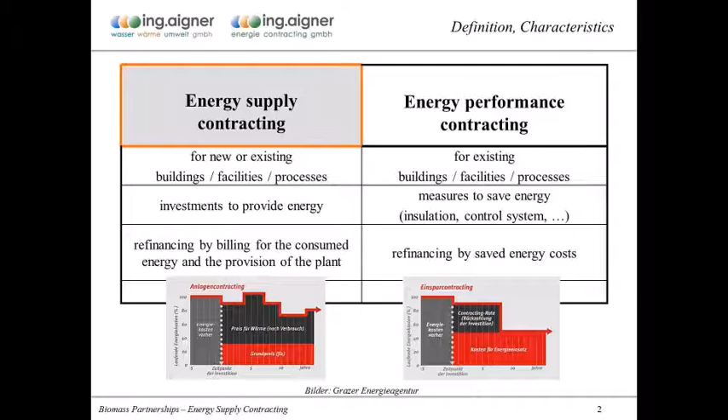When I'm talking about energy supply contracting or renewable heat contracting, I always add it with a full energy supply contracting or full heat contracting, which is covering all the stages which are required for the realization of a contracting project, or in specific a biomass project. So supply contracting is applicable for new and also existing buildings. The investments are primarily done to provide the energy to the customer, and the refinancing of the whole project is done by billing for the consumed heat on the one hand, and for the provision of the plant and for the services done by the contractor.

From the basic concept, energy supply contracting is an energy service. The aim of this energy service is to improve the efficiency in the energy production, but also, of course, on the secondary line, the efficiency in the energy consumption. When it comes to renewable heat contracting or to renewable systems, I always mention that just because it's a renewable system or a biomass system, that's not enough. Also, renewable systems, especially biomass systems, have to be really efficient.

What's the role of the contractor? The contractor is doing the planning, the financing, the construction, and the operation of the plant. And the plant can provide energy in form of heat or cold or steam or electricity, also compressed air, to the customer, to the buildings of the customer, to the processes of the customer. A main characteristic of supply contracting is that the contractor hires a room or a lot of land which he needs in order to build the plant or the equipment, and he hires that from the customer. The customer does not buy the plant. The owner of the plant is the contractor. The customer just draws the energy he needs from the contractor.

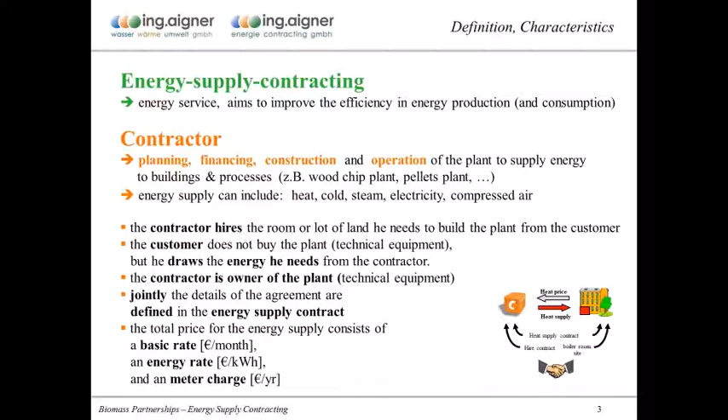All the details of this agreement are defined in an energy supply contract, and of course the contractor needs to get paid for all his services. And we have heard about the price models already today. I think in one of the first presentations, it was presented the basic rate and the energy rate, and also the meter charge.

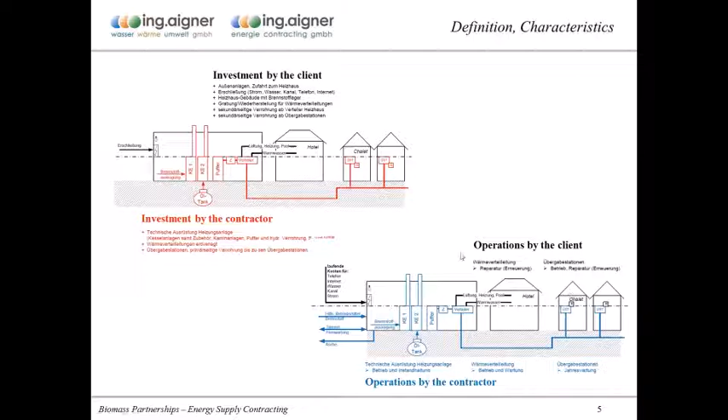Where can contracting be applied? Actually, there's no limitation, I would say. Usual applications are public buildings, hospitals, hotels, office buildings, and so on. And the concept in general is applicable for nearly every situation and constellation. It can be a customer with single objects or several objects, so then we have a local heating system. It even goes to a district heating system.

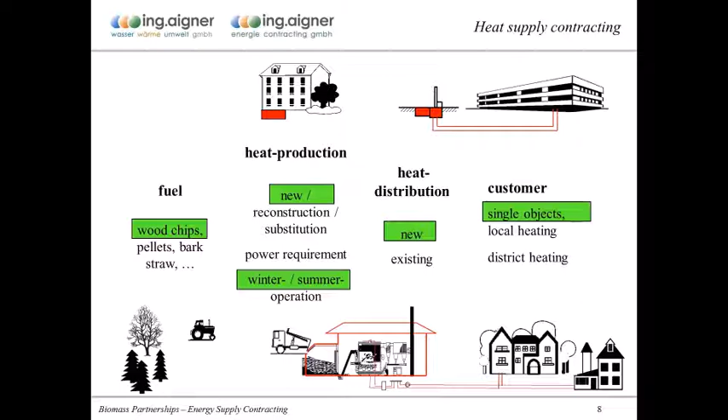The heat production system can be a new one. It could be a reconstruction of an existing system. We can have a winter and summer operation, or only winter operation. And also we can have different kinds of fuels, wood chips, pellets, or other renewable energies.

A very important thing in the whole contracting concept and process is, of course, the energy supply contract. I always say to our customers, in the discussion with our customers, that it's better to take enough time to clarify all the details of the agreement. We write it down. It's a partnership for normally 15 years. The acting persons can change, can shift. And so the other persons also have to know what was the basic idea of the whole project and contract.

And one thing I always mention is that as a contractor, it's in my own interest to have a common understanding of the responsibilities and duties of the whole contract, because it doesn't make sense for me to get a signature under a contracting contract if my partner or the customer maybe misunderstands something, and then we have 15 years of discussions and arguing. That's not the goal of a contractor, to have troubles the next 15 years.

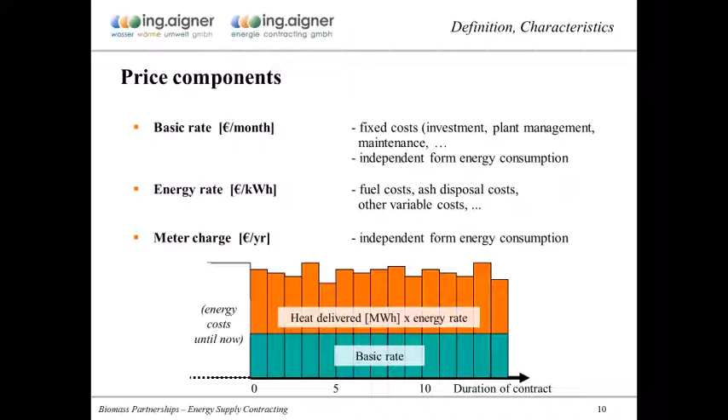On the markets, there exist several pricing models. I tried to put down here two examples of the two main pricing models, and the differences, the difficulties which have been encountered in Austria. Some companies have encountered these problems. That's why I would like to show this to you.

For example, we have a biomass plant. The nominal load is 1 megawatt. The heat demand is 2,500 megawatt hours a year, and the contracting period is 15 years. So these are just rough figures.

I said we have investment costs of 1 million euros, taking into account the funding, the financing, administration, operation, and repair costs. So the yearly production costs sum up to about 80,000 euros.

That's the fixed cost. The second cost group are the variable costs, as I mentioned before, fuel, ash, electricity, and so on. They sum up to about 30 euros per megawatt hour. So in total, the 30 euros per megawatt hour multiplied by 2,500 megawatt hours are 75,000 euros a year in costs for the operator of the plant, for the owner of the plant, for the contractor. In total, the production costs are 155,000 euros a year.

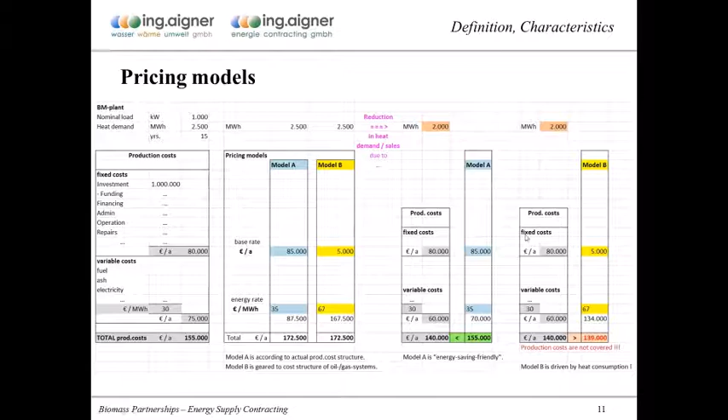Shifting to the price adjustment: because we have a contract period of normally about 15 years, of course price adjustment is required, and also for this theme, pricing model A is much easier, because the price development during the next 15 years, during the partnership, will be totally the same for the contractor and for the client. No difference if the client would have realized the project by himself or has realized it now with the contracting project. That's a very good thing, because actually there's no reason for discussions then between the client and the contractor.

Why are we talking about energy supply contracting today? Because I'm convinced energy supply contracting is a really powerful concept, a really powerful tool. When we're looking in general at the requirements in our energy supply, for instance for a hotel or a production process, we would like to have supply guarantee. We would like to have efficient, reliable technology. We would like to consider environmental aspects, get rid of fossil fuels, allow for the usage of renewable energies. We would like to become independent on a local or regional level, and we would like to have a high comfort.

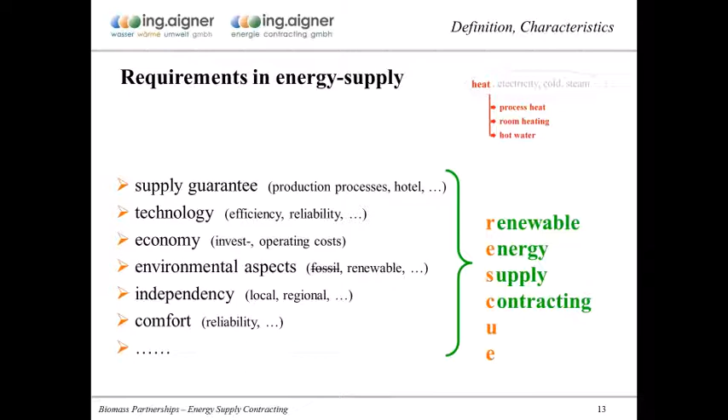And all these requirements are met by the renewable energy supply contracting concept. And this concept, it's a little bit provocative, but it can be one tool to rescue us on our way to decarbonization and efficiency.

The benefits, why is this so? There are a couple of benefits of renewable energy supply contracting, but one of the main really good things is that the investment costs are not a limiting factor anymore for the realization of renewable energy projects, because the investment costs are covered by the contractor. The contractor is calculating the total project for a time period of 10, 12, 15 years.

And so this allows the use of renewable and clean energy, the use of modern and efficient technology. And hopefully the contractor has special know-how of the technology he's using, so he can also gain a saving in the total fuel consumption. For the customer, of course, it's very comfortable, because all the risk and duties are assigned to the contractor, and normally the contractor has to guarantee the supply of energy, the supply of heat.

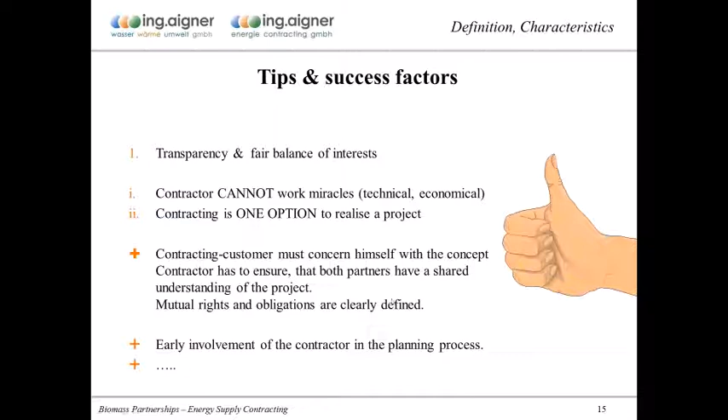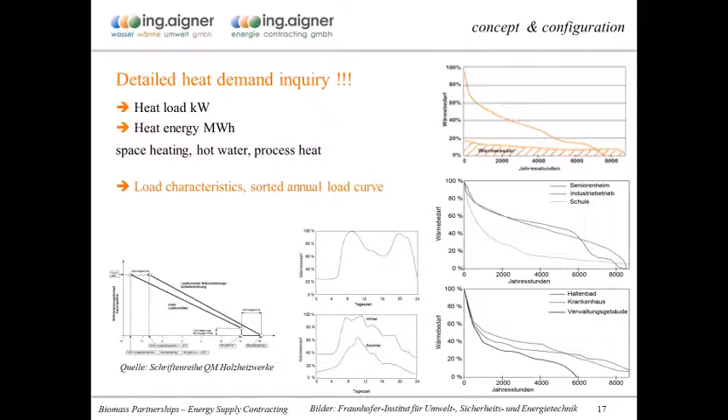The project phases are nothing special; it's similar to any other technical project. Really highly recommended is a good pre-feasibility check. In a few hours, it can be checked if a project makes sense or not. The key to a successful biomass project in general, and the same applies to contracting projects, is a detailed heat demand inquiry: checking the heat load and the heat energy demand. Doing this properly, the optimal system can be defined, optimal in view of the whole cost, the economics, and the efficiency of the plant.

So I just have to check the time because I don't have it here on my screen. Just give me a second. You have 5 more minutes, but I think it's okay if it takes you a little bit longer. Okay, thank you. It won't take long for the summary. Okay.

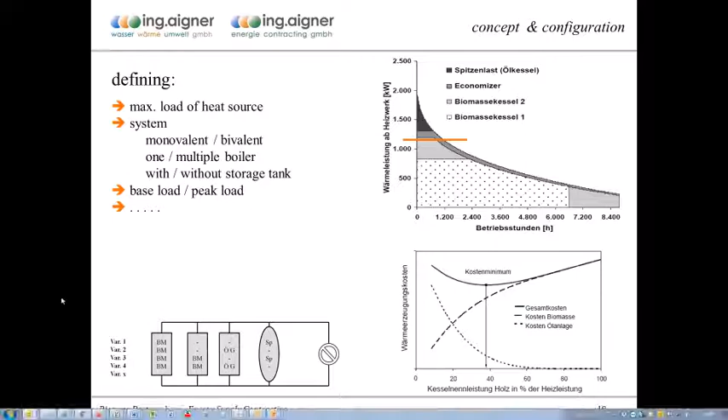Some examples. Here, a wood pellet contracting project for a hotel. I've chosen this project because it's a 1 megawatt pellet boiler. We provide heat to this huge 4-star plus or 5-star family hotel. You can see the hotel, and there are also some chalets. The interesting thing was it would have been much cheaper to provide the heat using wood chips, but the client didn't like the smell of the wood chips, so he wanted a pellet plant. The costs were at least 25% higher, but it was the wish of the customer, so of course we fulfilled that.

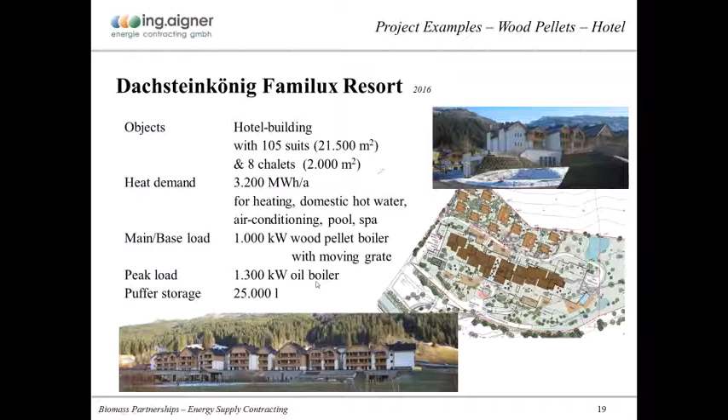We started this project 4 years ago, and we are very happy with it because it showed that our calculations were quite okay. We have a 1 megawatt biomass boiler and a 1.3 megawatt oil boiler for peak load. We calculated that we'd cover more than 97% with wood pellets. Actually, we cover nearly 99% of the yearly heat demand with the wood pellet boiler.

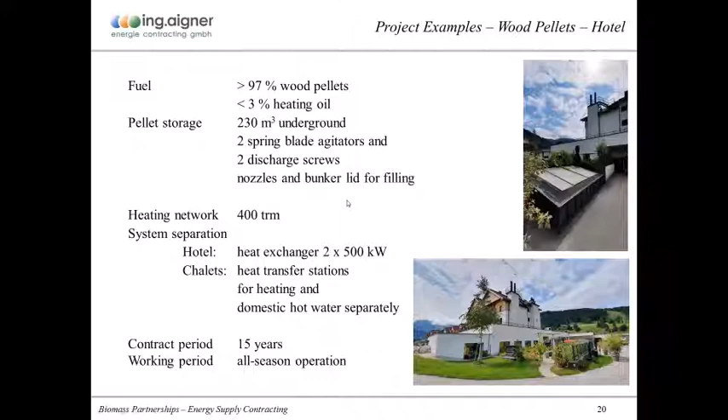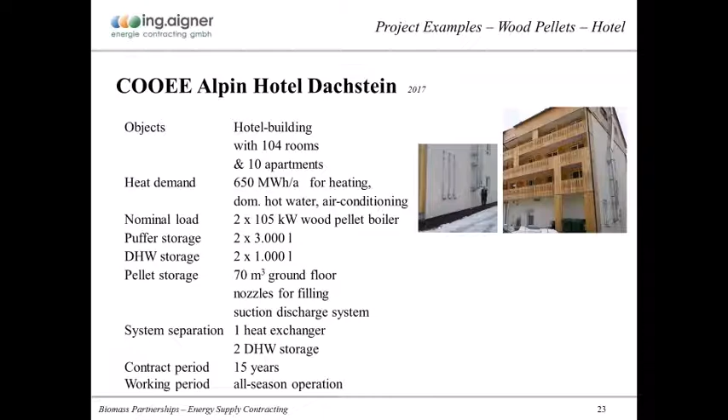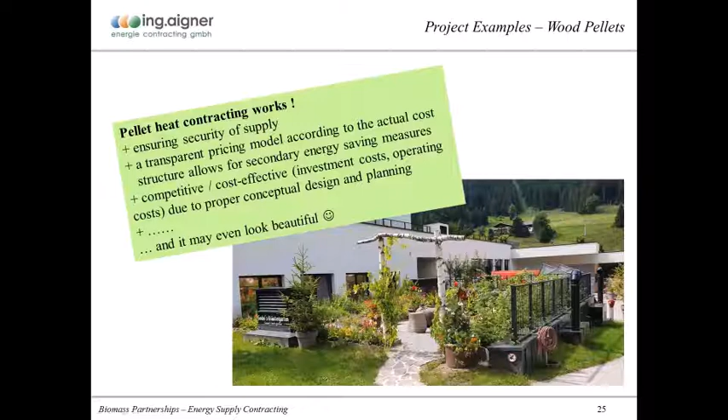The main message is pellet heat contracting works. It ensures the security of supply. We have a transparent pricing model, and we can provide a competitive, cost-effective solution. And especially for this, it may even look beautiful. What you can see here, beneath, is the pellet storage room and the boiler room for the whole hotel plant. That's the garden of the hotel.

Contracting also applies for industry projects. We started this project in 2006. It was a new built production facility from the company Fronius. You can see here on the right hand side, that's the area of the biomass plant. We rented this lot of land from the company Fronius and installed the biomass plant. It's all underground, so you can just see the chimneys. It's a biomass plant with 2 biomass boilers and a gas boiler.

There was an extent. In the beginning, the customer required 3,200 kilowatt. We did a detailed analysis of the load curves and so on. We said, okay, we will install 2.8 megawatt, split into 1.5 biomass and 1.3 gas. In 2010, there was an extension with additionally 650 kilowatt. This whole extension was covered by optimization of the existing plant, and still with about 50% of the nominal load covered with biomass, we can provide more than 98% of the yearly heat demand by biomass.

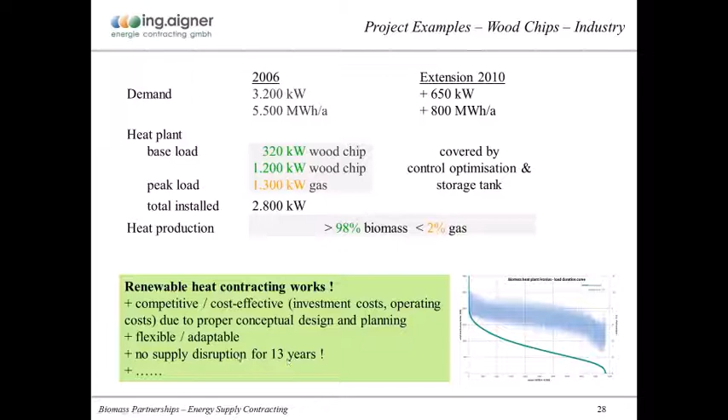A very nice project, we're in the 14th year now, and that's an older slide from last year. But we have had no supply disruption for 14 years now. So we're very proud of that.

Another project which should show the flexibility of the contracting model, a company where we provide heat for in Lower Austria. We started the project in 2007. It's a very active, agile company, so they had a couple of expansion stages: 2007, 2012, 2018. We started with a 1,500 kilowatt wood chip boiler and an existing oil boiler, so they switched from oil to biomass.

We started with 4,000 megawatt hours. Now, in 2018, it was 10,000 megawatt hours. Now we are actually at about 12,000 megawatt hours heat demand a year. And we built this part of the biomass plant, then we had the extension, we built this one, and so step by step the load was increased during the years. And that's a huge 125 cubic meter buffer storage tank.

And also here the message: renewable heat contracting works. It is also flexible.

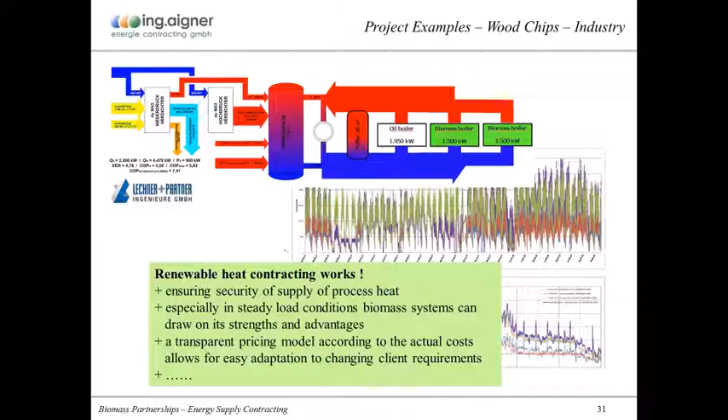And now we are coming to microgrids. Here a project started in 2018. That's a new build school building. There's some existing old houses, and here there is a single family area with single family houses. It was a very problematic project because, as you can see here, there was an owner, a project developer of the whole project, and during the first years, the whole project was sold to another project developer. So it took a couple of years until we could start with operation.

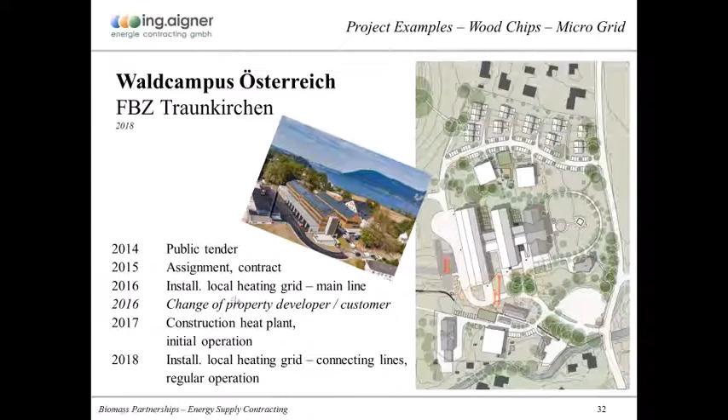And there was a very interesting specific thing there. In the first calculations or requirements by the project developer, they said they have a heat demand of 2,200 megawatt hours a year. When it was shifted to the other project developer, they improved, or changed, the standards of the building quality of the buildings. So now the heat demand is much lower than it was assumed in the beginning, at least 30% less than the 2,200 megawatt hours. But because of our pricing model, actually, for us, it's not a real problem.

It shows the positive effects of the pricing model I just described before. And also a microgrid, a holiday resort where we provide heat for 75 flats. Here you can see the biomass heat plant, and the whole holiday resort is provided heat from biomass. Also here we had an extension 2 years ago, and the extension was covered with the existing 400 kilowatt biomass boiler and 700 kilowatt oil boiler. And also here, when you look at the nominal loads, it's 1/3 and 2/3, and we still can cover way more than 95% of the yearly heat demand by biomass.

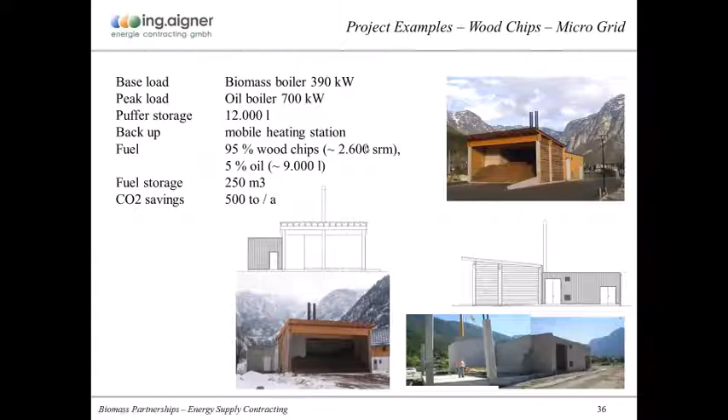Finally, again, the message: renewable heat contracting works, and I welcome your questions and discussion. Thank you.

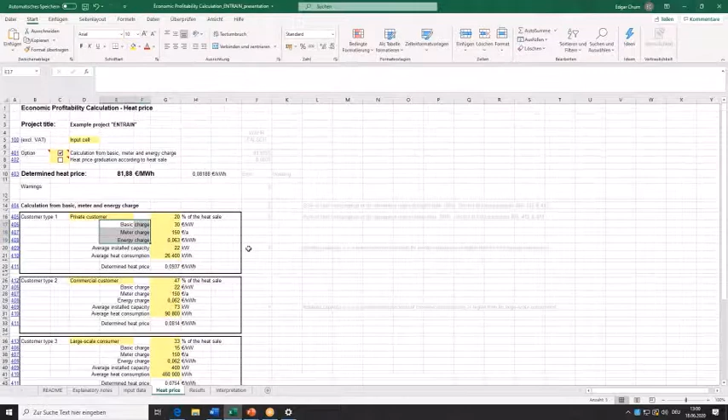What you can see here is that you can define 3 different types of customers, which we made here. We call them private customer, commercial customer, and large-scale customer, industrial customer, for example. You can define the shares of the total heat sale of each group and define an individual price model for them and the heat sale of this part.

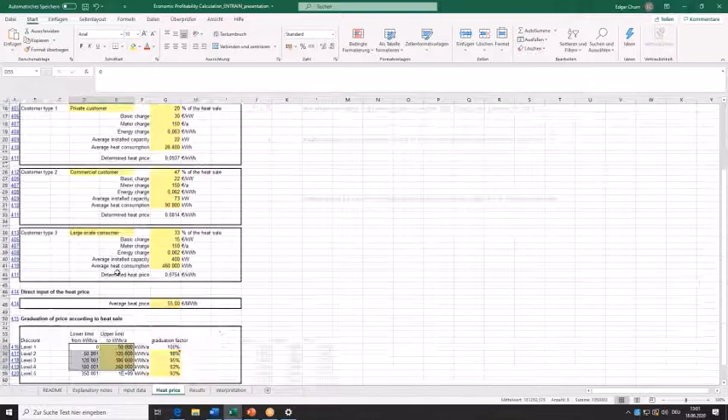Then you get an overall average price based on that model, which in that case is our input value for the calculation. Alternatively, you can insert directly an average heat price if you want to, or you can use another option: a graduation model of prices according to the heat demand of each customer. So both are possible. It should help you figure out what price models, what prices you want to take, or how they influence the total average heat price.